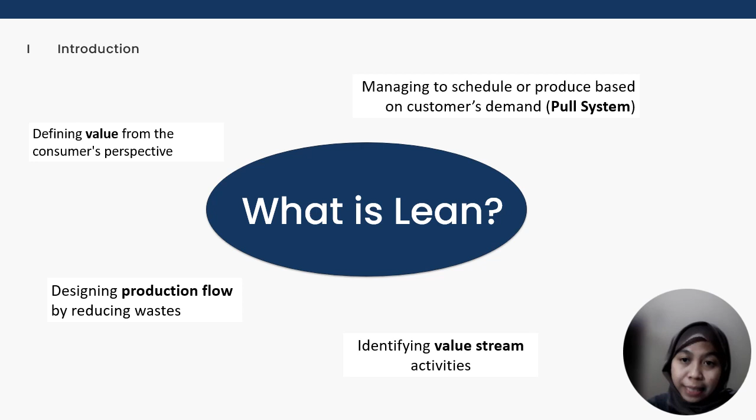The fourth one is managing to schedule or produce based on customers' demand, or we call it pull system. If the production of goods only commences when there is demand, the organization needs to ensure that they are able to accurately forecast demand so that manufacturing never actually stops but instead stays constant throughout demand's ups and downs.

The last one is improving the performance by continuously decreasing waste, or we call it perfection, which means analyzing metrics constantly so that areas of improvement can be easily identified in the pursuit of enhancing the customer's experience.

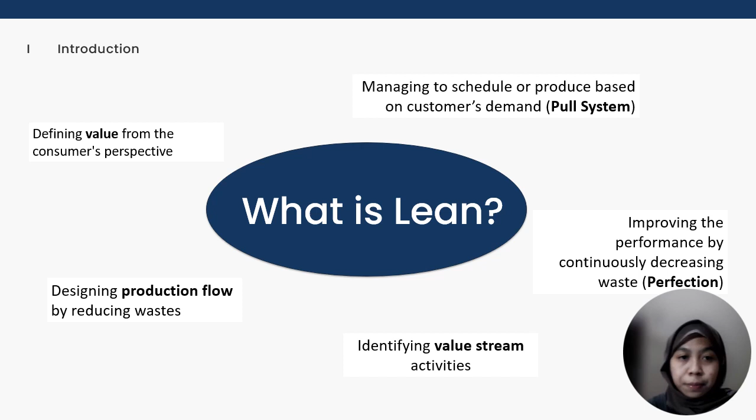Okay, a number of literature proves the positive performance of lean manufacturing methods that build an improvement system that yields goods and services with advanced productivity, decreased costs, and decreased lead time, eventually improving organization performance.

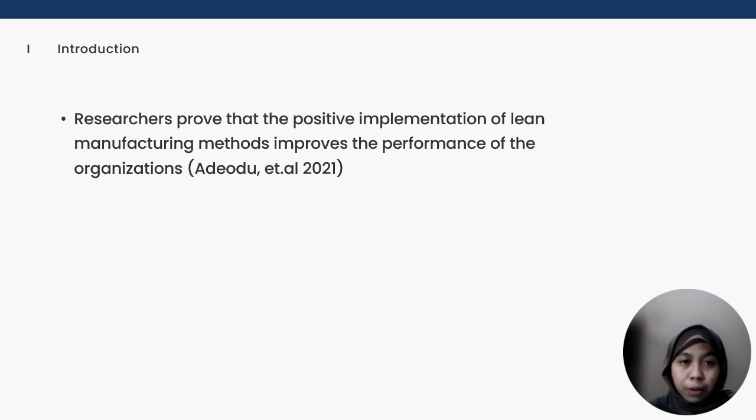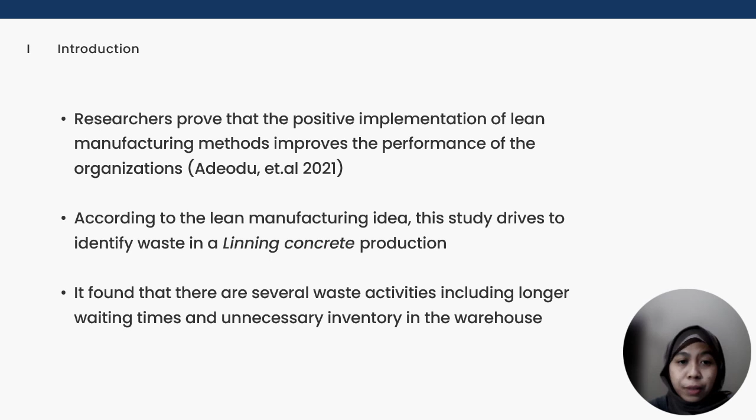According to the lean manufacturing idea, this study drives to identify waste in a lining concrete production. It found several waste activities such as the bottleneck between the inspection station and the lack of storage for unfinished product. Products that go to the inspection station have to wait due to the limited capacity of the storage area, which causes the total production time to become longer. And through the lean concept, it's enabled to give improvement at the critical waste.

This case study was conducted with a local concrete manufacturing company in Indonesia. We already collected 39 completed surveys. The data was obtained from observation, interview, and questionnaire distribution. The questionnaire consists of 7 wastes including overproduction, defect, unnecessary inventory, overprocessing, waiting, unnecessary motion, and excessive transportation.

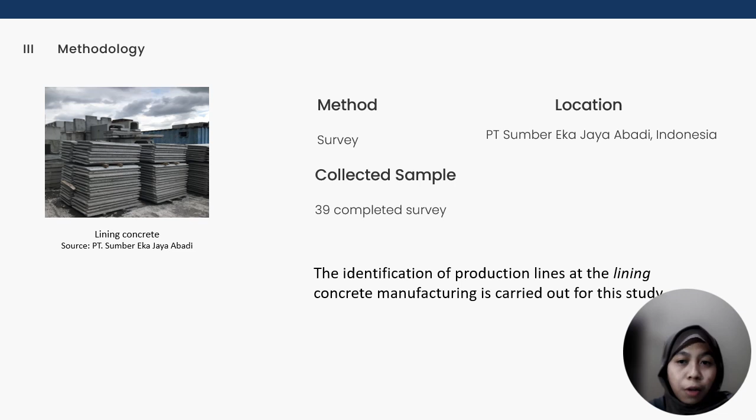And the study focused on waste identification at the lining production line. To the best of our knowledge, lining is a concrete product used as drainage. It is attached to the wall of the water channel to prevent erosion.

The proposed framework's initial stage begins with generating value stream mapping or VSM that describes the flow of information and material flow. Then we need to distribute the questionnaire and perform the weighting method to get the highest weight value, which describes the critical waste. The following step is to determine value stream analysis tool or VALSAT. After receiving the questionnaire results, VALSAT is used to analyze waste in detail.

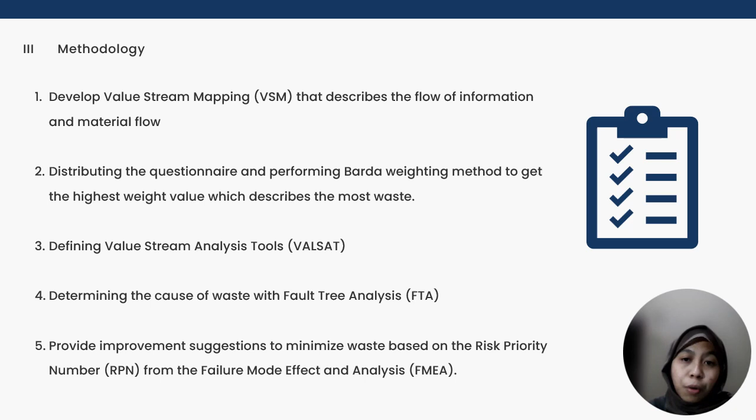The next step is to define the cause of the waste using fault tree analysis or FTA, and the final step is to provide improvement suggestions to minimize waste based on risk priority number or RPN from the failure mode and effect analysis or FMEA.

Now we are in research results. And I want to remind that this research used a survey method and there are 39 completed surveys. The purpose of distributing the questionnaire is to find out the dominant waste that occurs in the lining production by performing the Borda method. Through table 1, we find there are two critical wastes, including waiting and unnecessary inventory. Then the selected waste will be analyzed in detail to discover its causes.

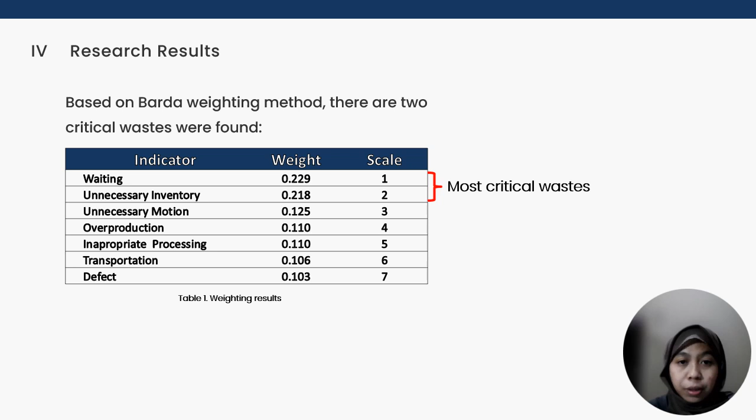After discovering the critical waste, we use fault tree analysis to find out the root cause of a problem. We know that waiting is the waste with the highest points in the lining process sent to the warehouse. Waste waiting causes lining entering the inspection station to be delayed because inspected lining cannot be issued.

The biggest failure mode of waste waiting is that product has to wait a longer time before it is transferred to the warehouse. It is caused by the limited capacity of the forklift, and the smaller number of operators causes waiting in moving the lining to the warehouse. The company doesn't have a specific storage area, so the inspected lining is waiting for free space in the warehouse.

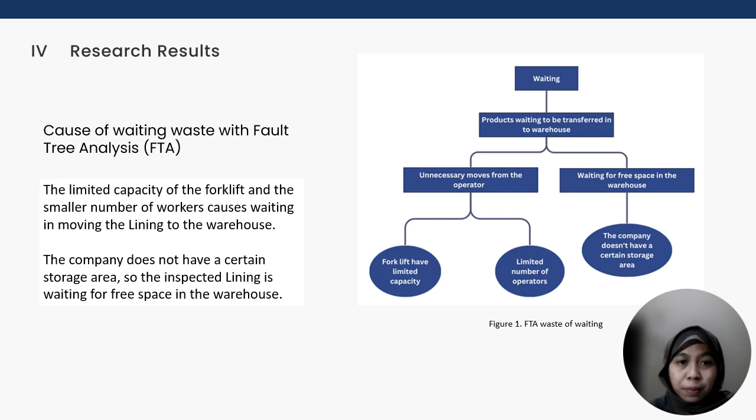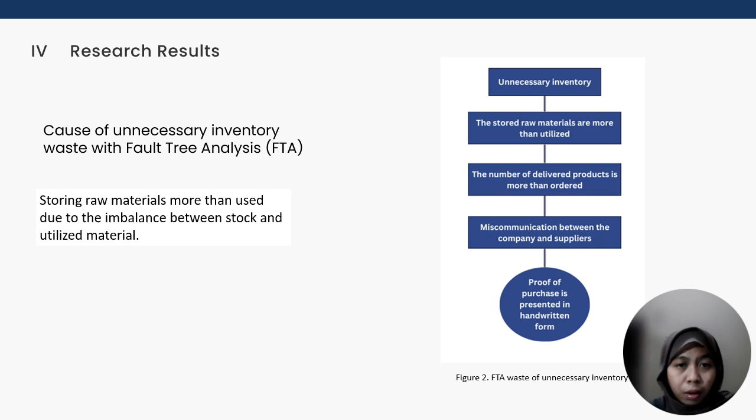Now we move to the causes of unnecessary inventory waste. The biggest failure mode of unnecessary inventory is storing more raw material than used due to the imbalance between stock and utilized material. It happened because the number of delivered products is more than ordered, because proof of purchase is presented in handwritten form. Therefore, miscommunication between the company and supplier cannot be avoided if the proof of purchase has a writing error, loss, or damage.

Subsequently, both wastes will be identified by the FMEA tool in order to find the root causes. The result of the calculation of the risk priority number or RPN in the FMEA tool shows that waste waiting with the cause of limited warehouse area has the highest value.

Moreover, since the product or lining has to wait due to limited storage, the improvement suggestion is to provide a warehouse layout where each item has a certain storage area. Thereby, waiting and the total lining production process time can be shorter.

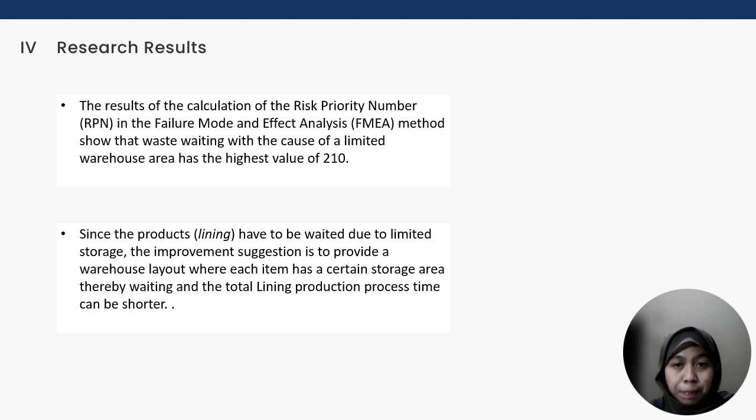Then, we can conclude that the highest waste in the lining production process is waiting and unnecessary inventory. Based on FMEA analysis, the highest RPN value is discovered in waste waiting. Due to limited storage area, the proposed suggestion is to enable a storage area for one type of goods so that the material handling process runs smoothly and the lining waiting time is shorter.

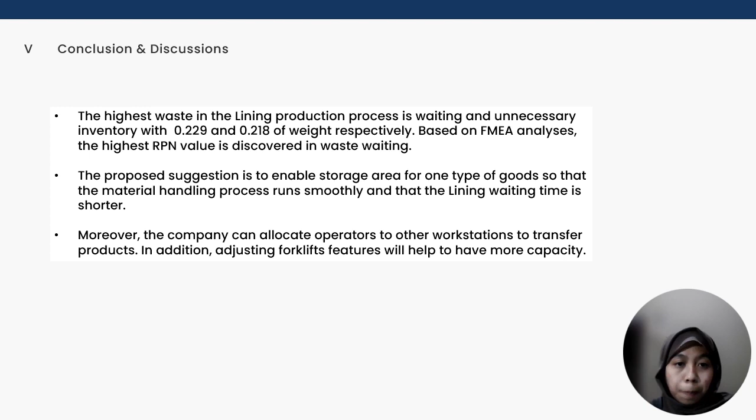And moreover, the company can allocate operators to other workstations to transfer product. In addition, adjusting forklift features will help to have more capacity. Okay, thank you for listening.